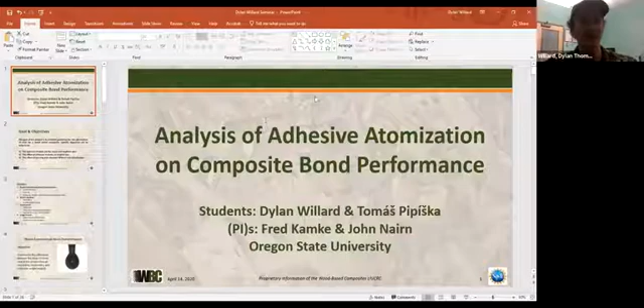This is very exciting. This is the first time I have given a live presentation in a very long time. I've been used to just recording videos and putting those up for people to watch, and you get to do a bunch of retries. So this will be fun.

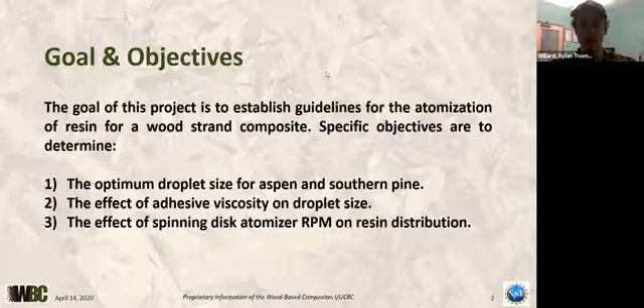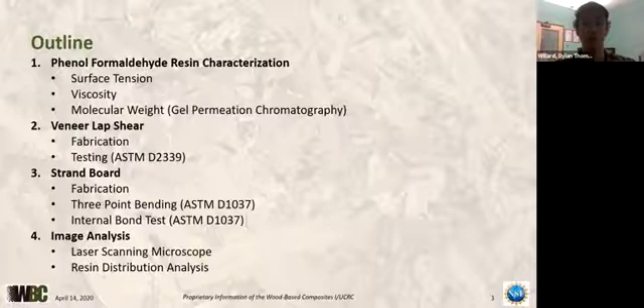I'll give you an outline of what we'll be covering. There are four main components: the characterization of our phenol formaldehyde resin, which I'll elaborate on; two main types of mechanical testing, veneer lap shear testing and testing of strand board, which we are making in our lab; and the fourth section, where I'll discuss the image analysis of adhesive droplets on our wood strands for this project.

The objective of our phenol formaldehyde resin characterization is to determine the differences of our resin. We are using three different adhesives for this project. We initially got our phenol formaldehyde adhesive from Arclin down in Springfield. They do not specifically manufacture OSB phenol formaldehyde resin there; they manufacture PF resin for plywood and LVL, if I'm not mistaken. Just a heads up, I might refer to phenol formaldehyde as PF.

To determine the different characteristics of our phenol formaldehyde resin, we examine the viscosity, the tensiometry, and we analyze the molecular weight of our adhesive. We are using three different molecular weights of adhesive for our project, which I will elaborate on in a further slide.

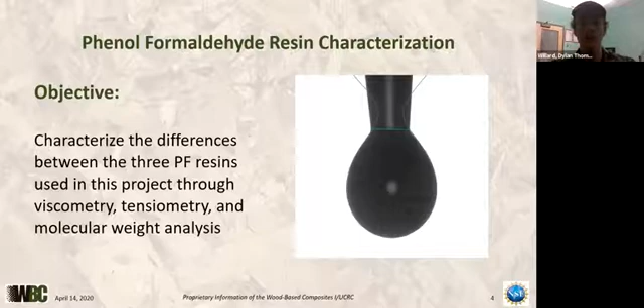The tensiometer is hooked up to a water bath, which can control the air temperature within the box, allowing us to check the surface tension at different temperatures. This is very important because a big part of this project is keeping our resin temperature consistent, since elevated or decreased temperatures can cause different resin properties. So we wanted to check the tensiometry of the adhesive over a wide variety of temperatures.

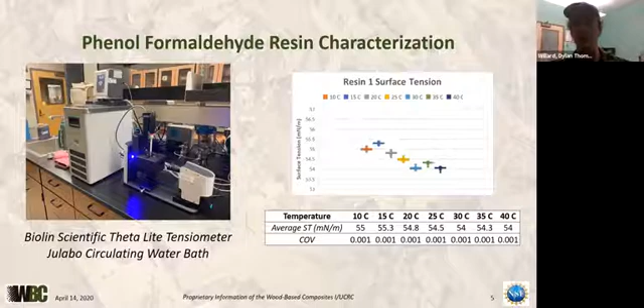We're actually going to go back and repeat this test with some of our adhesives, because one issue we've run into is taking the tensiometry at elevated molecular weights and viscosities, due to the size of the pipette tip we use to suspend the droplets. Once we get up to higher molecular weights with higher viscosities, it's hard for the adhesive to be sucked into the pipette and then suspended out to do the surface tension analysis. So we're going to go back and test over a range of lower molecular weights and viscosities.

The second test we do to analyze characteristics of our PF is a temperature versus viscosity test. This is very simple - we have a water bath, which we use to heat or cool our resin, and then we have a spinning disc viscometer which we suspend into the resin to measure the viscosity.

How we advance the resin is we allow it to sit at elevated temperatures in a water bath for a certain period of time, and we constantly monitor the viscosity. Once it reaches the desired viscosity, we pull it out of the water bath and put it in a cold room to stabilize, so we can go back and use it at this elevated viscosity when we need to test.

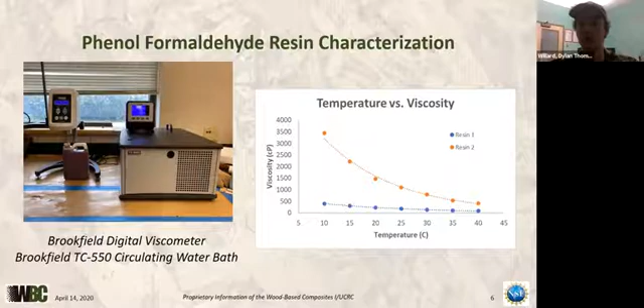For our third resin, since we'll be using 3 resins for this project, we initially wanted a viscosity of 2,000 centipoise. But after testing with the resin matured to 2,000 centipoise, we found it was actually too viscous for the atomizer to handle. One important part of this project is consistency - when using an atomizer, you want a certain rate of flow for the adhesive through the lines. But over time, this resin started to clog the atomizer, and we couldn't maintain a consistent flow. So we had to reevaluate, and for the third resin, we are going to aim for a 500 centipoise viscosity resin at 25 degrees C.

The final part of our resin characterization is analyzing the molecular weight. We do not do this here at OSU - since my resin is from Arclin, we're able to take samples down to Springfield for them to do gel permeation chromatography tests and analyze the molecular weight and molecular weight distribution, so we can understand how this also affects the adhesive performance on the bond line.

As you can see, resin 1 and resin 2 are on the screen. I actually just received my email from Arclin this morning analyzing the third resin's molecular weight, but I didn't want to rush and reformat everything. We've already made the third resin and started the test - we're currently in the process. So stick around for my defense if you're interested to see the next steps of this project with the third resin.

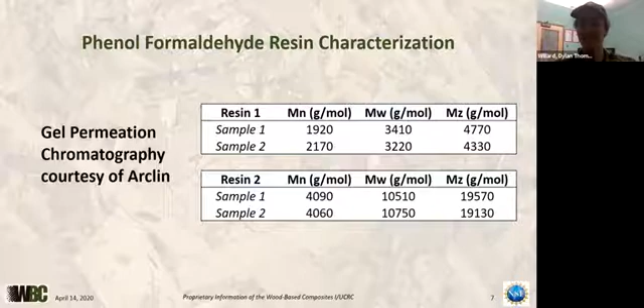So now I'm going to get into the mechanical testing part of this project. The first method of mechanical testing I'm going to describe is our lap shear test, which we did according to ASTM D2339.

It's very simple: we overlap 2 veneers that we make, which I'll describe the process of in the next slide, and we pull them apart using the Instron downstairs. I'll describe the different methods that we use.

We do 2 different species of wood. We are testing southern yellow pine and aspen for all parts of this project.

This is because those are 2 common woods used to make OSB across the nation, but it differentiates depending on location. For example, the OSB strands we acquired for this project, which are aspen, came from the Midwest, and the southern yellow pine came from Alabama. In those different regional areas, that's the products they're making OSB with, so we wanted to do tests on both species to have relevant information for all industry members.

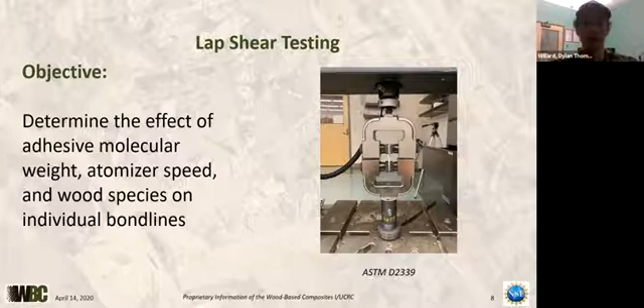To create our lap shear specimens, we sourced our aspen and southern yellow pine from vendors in North America, which was Louisiana Pacific. We sourced these from a plant in Michigan and Alabama, and whenever we ordered strands, we specifically requested that they send us some logs as well so we could make individual veneers.

This was because when planning the lap shear tests, we realized there might be a lot of variability trying to just take 2 OSB strands and sandwich them together, since they're very non-uniform. But by making our own veneer, we cut out a lot of that variability and had a consistent piece of veneer in size and grain orientation, which helped give us more consistent results.

To make these from plain logs, we cut the logs into 1-foot sections and quartered them. We soaked them overnight, or at least for 24 hours, in a heated tub -- I was about to call it a hot tub, but we don't have one of those.

Then we were able to use the radial veneer slicer down at Oak Creek to cut off sections about 1 foot long by 6 inches wide, and from there we cut out these 1 by 2 inch pieces of veneer.

To make sure the surface quality was consistent on all of them, we oven dried these with weights on top so they would flatten out. We also used a hand planer and a wood scraper to level out the surface quality.

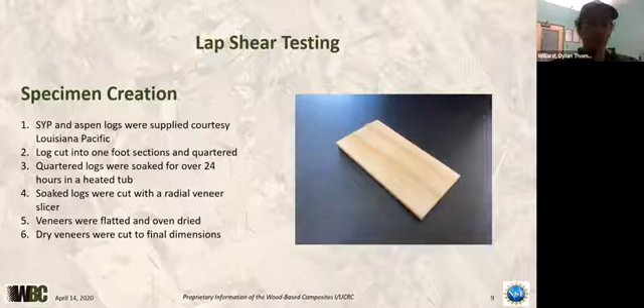So to actually make our lap shear specimens, first we had to spray some adhesive on them. We did this using a custom blender door for our OSB blender here in 191. If you've seen our OSB blender, we have a custom door that fits on the front -- a pneumatic sliding door.

You can see in the photo it has 4 exposed areas where you can put OSB strands, specifically for these little veneers we cut out to fit in there, and you can spray a 1 by 1 inch area. The important part is that we can do it for a controlled period of time.

It was difficult to plan how we were going to spray individual veneers, because once you're first starting the atomizer, it doesn't have exactly the same spray pattern as once it gets up to speed. With this device, we can run the atomizer for a bit, let it get up to speed, spinning at a consistent 7,000, 10,000, or 13,000 RPMs, which are the speeds we use.

Then you can turn on the resin pump line, and once the resin is spraying out, you can open the doors and get a controlled, even spray for a certain amount of time. We initially did 30 seconds, but after further examination, we realized that absolutely caked the strands.

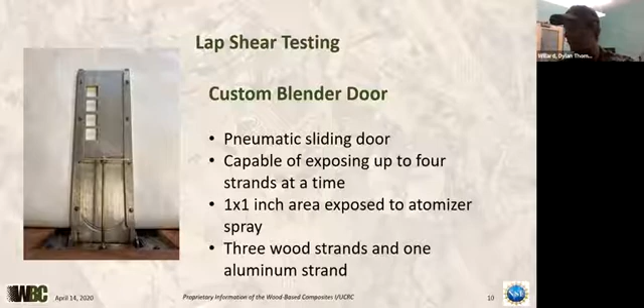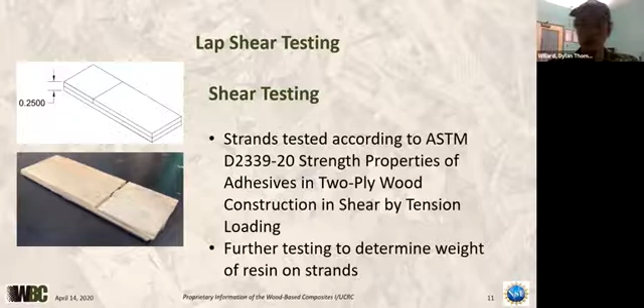One thing we were trying to find a correlation with, whenever we tested these in shear, we noticed these are not having similar strength performance properties. The 13,000 RPMs is holding much less load, but this is expected to be because of the weight of adhesive on the strand. Because when you're atomizing adhesives at a faster RPM, you're going to get much smaller droplets, which will tend to linger in the air longer, or it could be spraying in a different direction than where we have this fixed location within the drum. And you can get different weights of the adhesive on the strand.

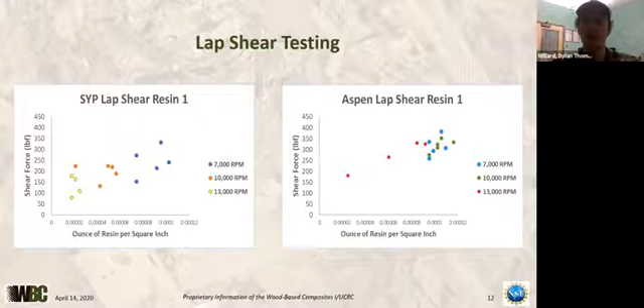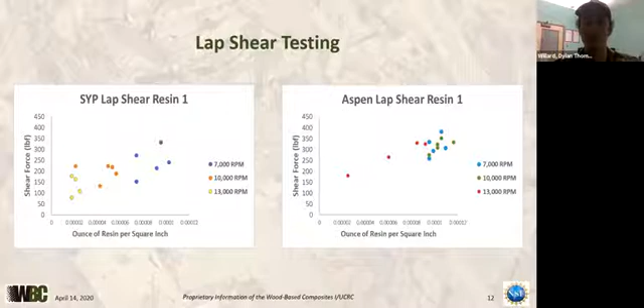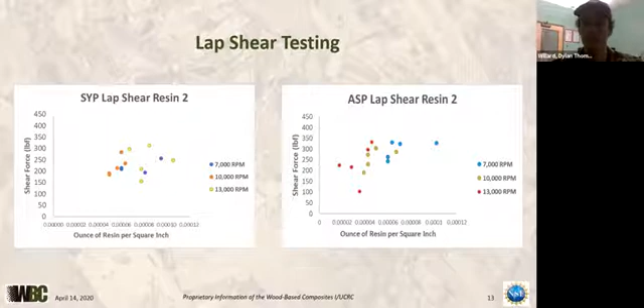So now I will move on to our strand board testing. This is the primary part of the project. We are making a lot of strand board for this project to determine its actual performance characteristics. Once again, just like the lap shear test, we're doing Aspen and Southern Yellow Pine, 3 different atomizer speeds, and 3 different molecular weights of adhesive. We're performing all the same tests to see how this all affects the strength performance of our strand board.

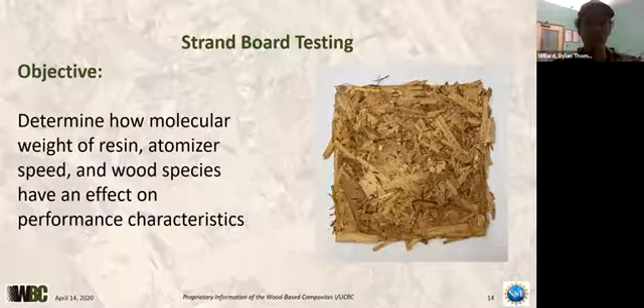I can't change slides now. Let's see, there we go.

So this is an overview of our press schedule, which I will explain in a second. On the left side of the screen, you can see what a mat looks like going into the hot press and what it comes out looking like after it has been hot pressed. You can see the thickness significantly goes down, so that is a good thing.

I'll go over a few main takeaways I'd like for you all to know from this graph. Our target density of our strand board is 40.6 pounds per cubic feet. We decided on this based on literature review and what OSB manufacturers make their strand board to, based on their different densities for their products with similar species.

We pressed this to 0.51 inches thick, and each of these boards is roughly 16 by 16 inches. You cannot get it a perfect 16 by 16 inches because it has a little bit of squeeze out.

For the actual press schedule, just as a simplified version, the main part of this press is pressing it for 6 minutes at 200 degrees C. For some of you who know a lot about OSB, you may think that is a long time — usually you might only need to press it for like 3 minutes. Well, based on preliminary studies, whenever we pressed it at this same temperature of 200 degrees C for lower times, we had a lot of bond line failure in the middle of the OSB itself.

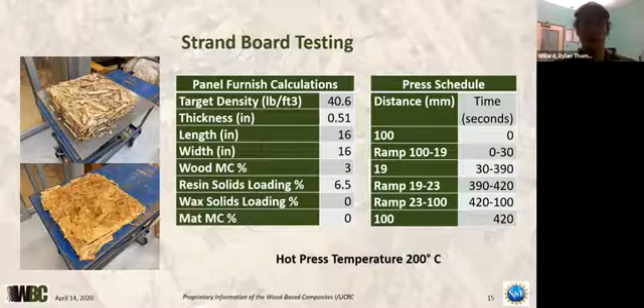So we did 2 different types of testing on our strand board: internal bond testing and three-point bending tests. This is a little diagram I made to describe how we cut up our strand board for testing. We take out 10 internal bond specimens and then 3 three-point bending tests.

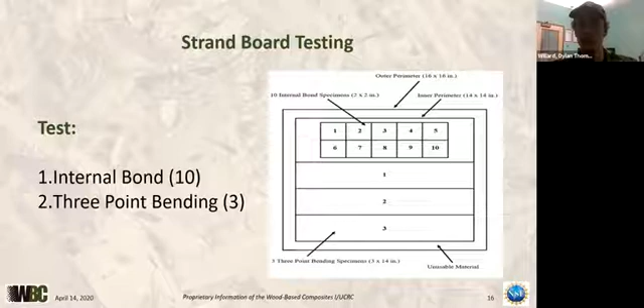As I said previously, there's a little bit of squeeze out on the edge of the strand board. This is why we have this perimeter of unusable material, so we don't get parts of the board that are low in density and don't meet the performance requirements or the average density we are looking for whenever testing.

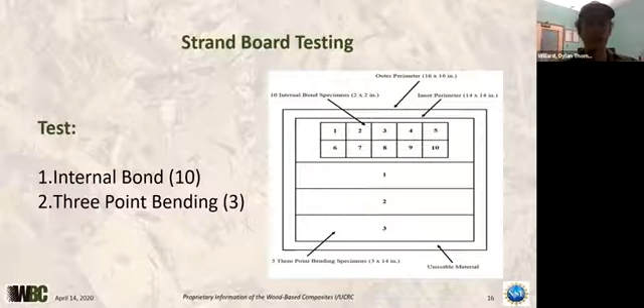So for the strand board testing with the internal bond test, this is the Aspen strands. Let me turn the lights back on really quick — there they go. So these are the Aspen tests.

I'd like to take a moment to look at the color scheme. This will be a repeating theme whenever I show you other tests in the future. You'll notice there will be blue, red, and yellow. The darker color will be the first adhesive, and the lighter color will be the second adhesive, and these will be for the same RPM speed.

So when you're looking at the graph and you see blue beside blue, for example the dark blue next to the light blue, the dark blue is the first molecular weight of adhesive, resin 1, and the light blue is the second molecular weight of adhesive, resin 2, for the same wood species and same atomizer speed.

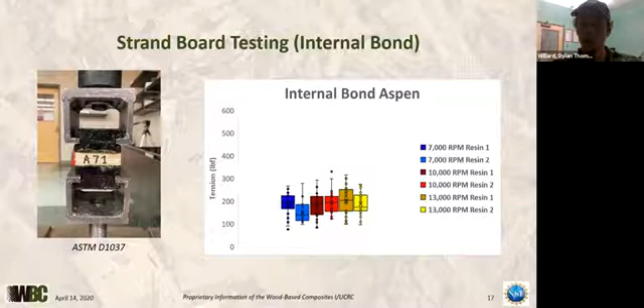As we can see, based on the box and whisker plots, the tension in pound-force on the internal bond testing seemed to be either on par with the first resin as it was for the second resin, or seemed to be less. We also noticed this trend in the southern yellow pine for the internal bond test — it seems as if the second resin performed not as well as the first.

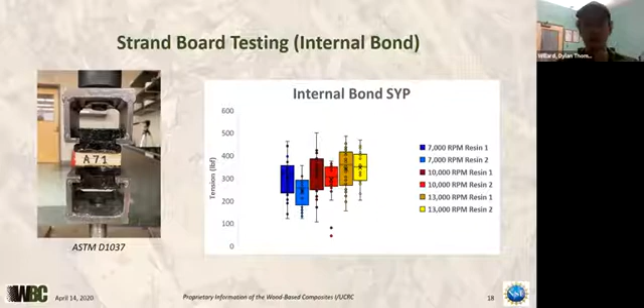When we were testing our third set, this is something we did not do the first time — we were going to measure the mass of the internal bond specimens before testing so we can do a correction for density of all of our test samples. So those are the internal bond tests.

Now I'm going to move over to the 3-point bending test. This was over a span of 14 inches. If you are familiar with ASTM D1037, it is supposed to be over a span that is 24 times the thickness of the panel itself.

You might be thinking that should be 12 inches, since we pressed it to half an inch. Well, after pressing, the board likes to spring back a little bit, so they actually ended up being a little bit thicker than we pressed them to. So for this, we adjusted the span of our 3-point bending test.

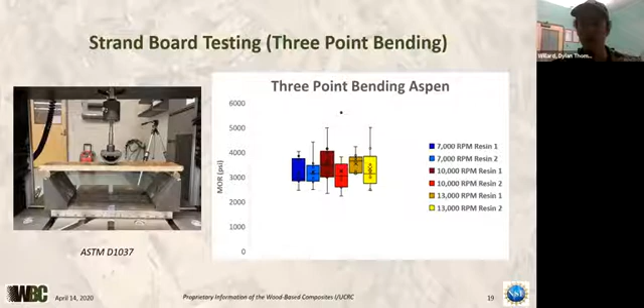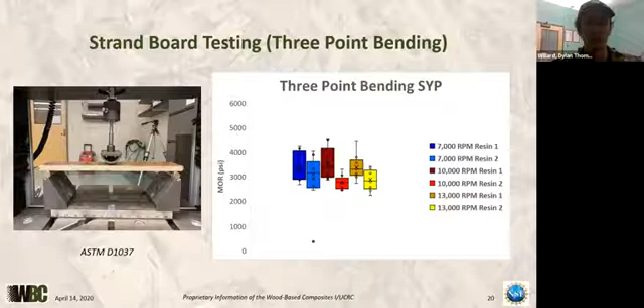Just like the same trend we saw in the internal bond testing, it appears as if the first adhesive performed better most of the time for the southern yellow pine and for the aspen in the 3-point bending test. So this was a very interesting find. Yeah, I just wanted to go over that really quick.

So now I'm going to move on to the fourth and final part of our project, which is the resin distribution image analysis, which kind of ties everything together. With the different molecular weights, you're going to get different viscosities of adhesive, as we saw in the initial part of the project, and that can affect how the adhesive is atomized during OSB blending. You can get different droplet sizes and distributions. So we wanted to observe if there is any correlation between the droplet size of adhesive on the strands, for both the lap shear test and the strand board manufacturing process, and determine how this affected the composite performance.

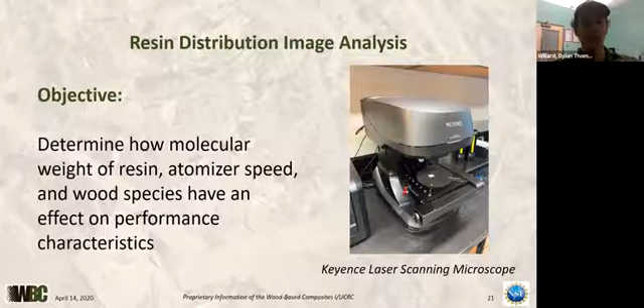I'll describe where we pulled samples from and how we did this. During the lap shear test, we had 3 wood strands that we were spraying at once: 2 for the lap shear test and 1 for image analysis. So for every lap shear test we've done, there's a corresponding image analysis done on a third strand. For the OSB strand board, after blending and before pressing the panels, we went into the blender and selected strands out of there, not with very specific selection, but they just had to be a certain size so we could take a large enough photo.

So this was as unbiased as it could possibly be. We went into the blender and pulled strands, 5 of them. We're going to go back and take photos of both sides of these strands to increase the amount of data that we have. So for every blender run that we did, we pulled 5 strands out to do an image analysis on. And how we did the image analysis was using a laser scanning microscope.

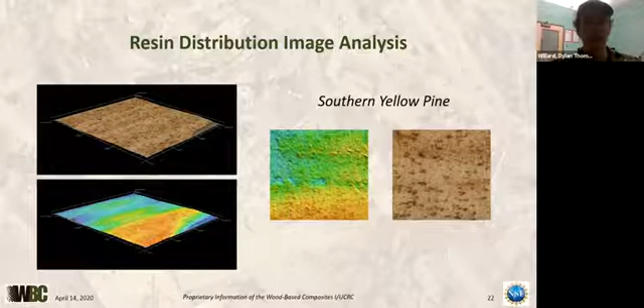With the third resin that we are going to be soon testing and making — well, I've already made the strand boards for the third resin — I pulled many more strands out of the blender.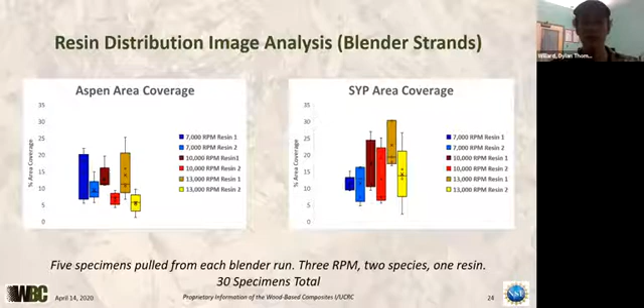We're going to do some very in-depth statistical analysis for the lap shear strands. I've briefly talked with Ariel, who I'm sure you're all familiar with as the statistics guru, about figuring out how to do a two-way ANOVA for our lap shear testing. So we're going to do a deep dive and try to solve the mystery behind what affects the bond line performance of our lap shear test and strand board testing.

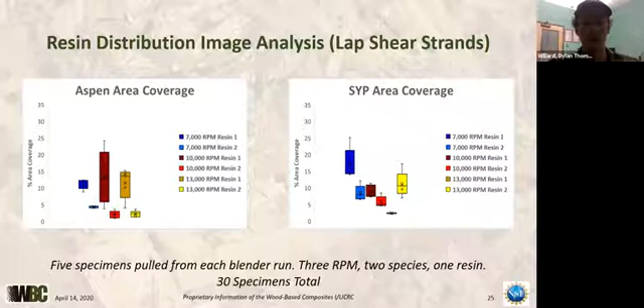If I'm not mistaken, that's all I had to share with you all today. If you guys have any questions, I'd love to hear them.